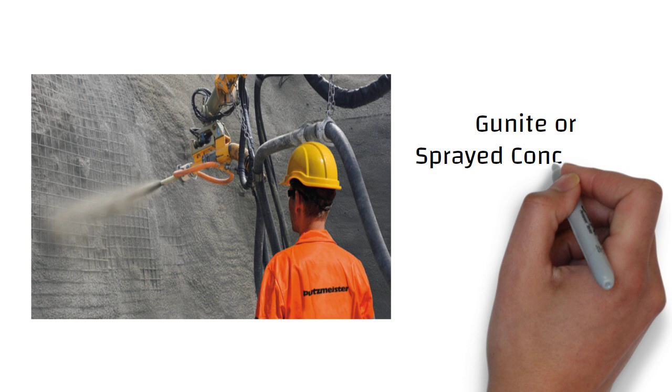Hello friends, shotcrete, also known as gunite, sprayed concrete, pneumatic concrete, or guncrete. This construction technique was first used in 1914.

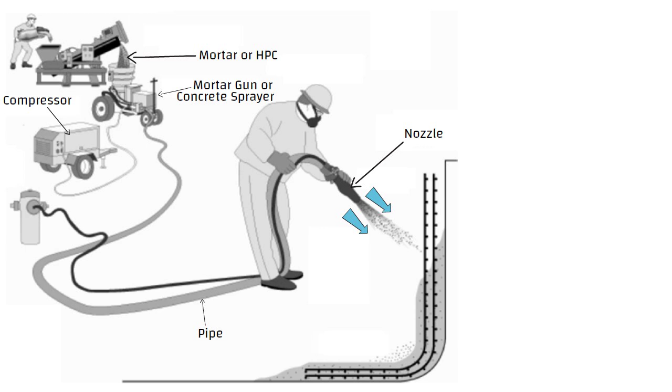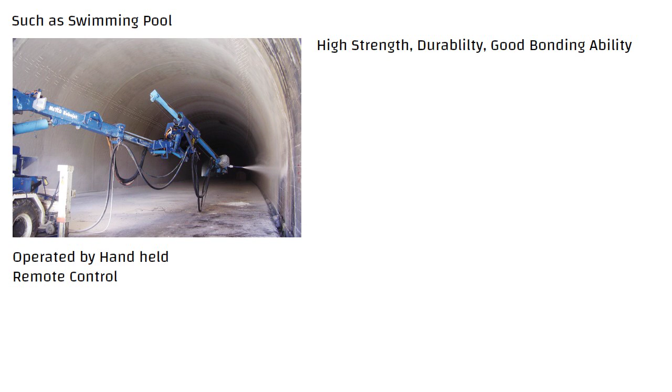Shotcreting is done with a special unit which consists of a mortar gun, also known as concrete sprayer, and a compressor. In this technique, a mortar or high performance concrete is conveyed through a pipe and pneumatically projected at high velocity onto a surface. The nozzle is controlled by hand on small jobs such as swimming pools, and on larger work it is attached to mechanical arms and operated by handheld remote control. It has high strength, durability, good bonding ability, and can be used in areas of difficult access. It can be easily sprayed onto a surface at high velocity, making it handy for operation.

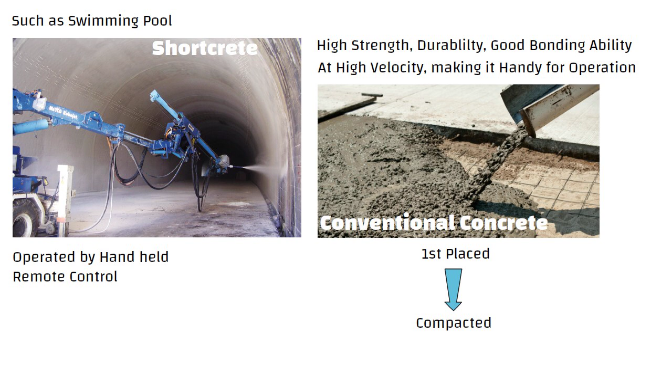Now let us understand how shotcrete is different from conventional concrete. Conventional concrete is first placed and then compacted, whereas shotcrete undergoes placement and compaction at the same time. The impact created by the application consolidates the concrete.

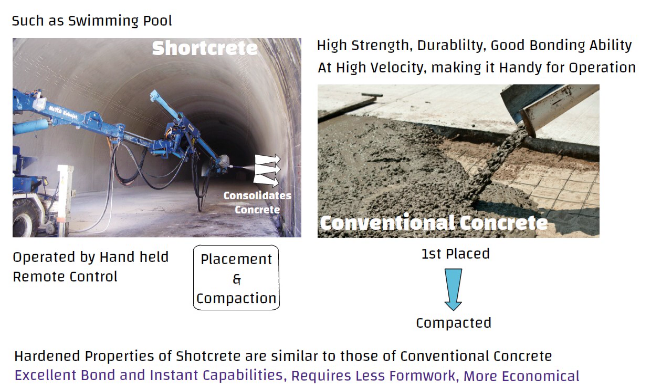Although the hardened properties of shotcrete are similar to those of conventional concrete, the nature of the placement process results in an excellent bond and instant capabilities, particularly on complex forms or shapes. The shotcrete process requires less formwork and can be more economical than conventionally placed concrete. Poured concrete can have a compressive strength of 2500 to 3000 psi, whereas shotcrete exceeds 4000 psi.

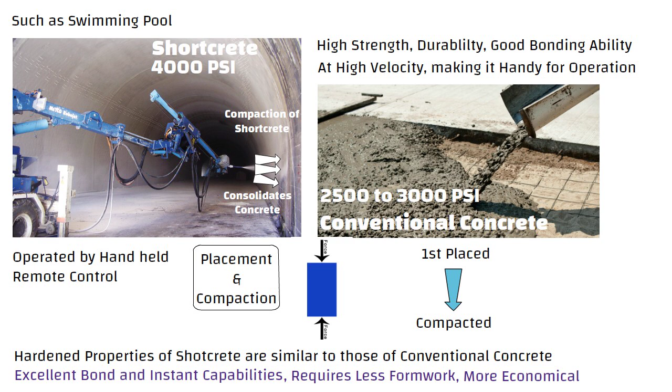When concrete is sprayed on a surface, it causes compaction of the shotcrete paste, which results in good adhesion to the surface. Shotcrete can be applied in two ways: one, wet mix, which we call as shotcrete, and two, dry mix, which is also known as gunite.

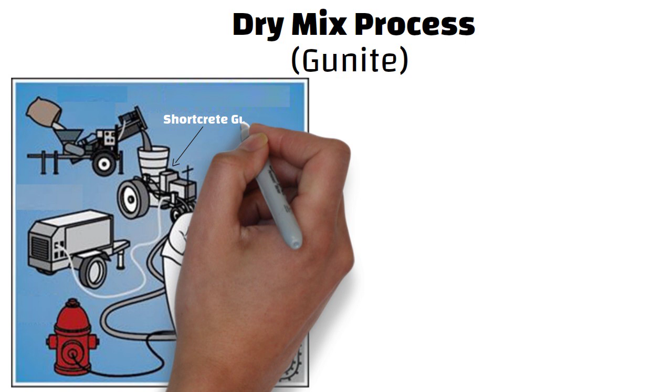Let us discuss the dry mix process first. You can see in this picture, this equipment is called the shotcrete gun, and this is the air compressor. Dry ingredients like cement, sand, aggregate and admixtures are placed into a hopper and blown through a pipe using compressed air to a nozzle. The water is injected at the nozzle by a nozzleman to hydrate the mixture immediately before it is discharged onto the receiving surface.

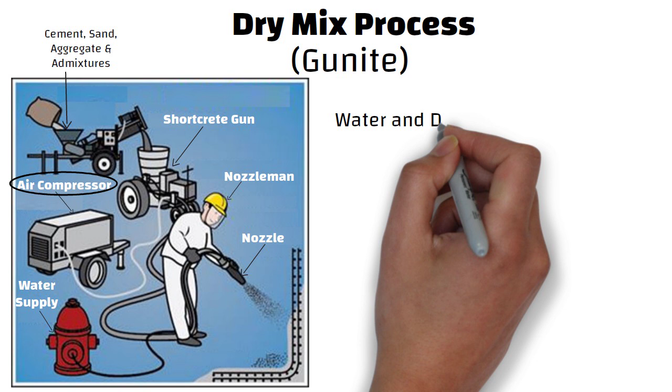The water and the dry mixture are not completely mixed, but this is completed as the mixture hits the receiving surface by high impact. This requires a skilled nozzleman, especially in case of thick or heavily reinforced sections. The nozzleman can operate from 1000 feet horizontally or 500 feet vertically from the gun.

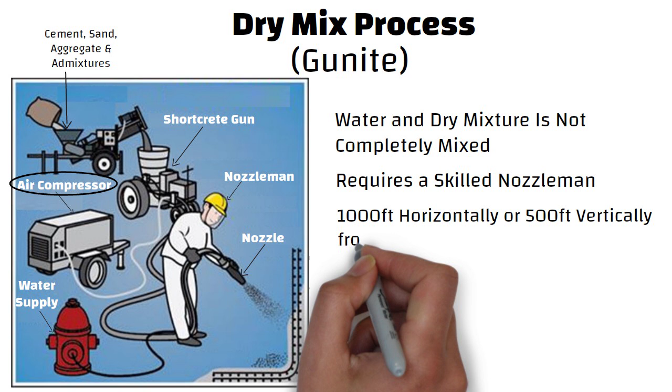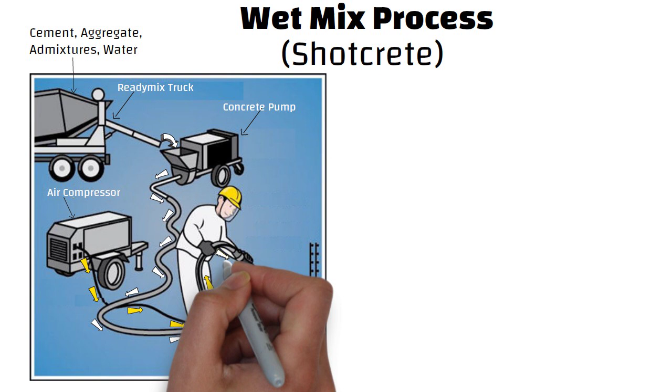Wet mix process. You can see in this picture, the ready mix truck is located here. This is the concrete pump and this is the air compressor. The cementitious material, aggregate, admixtures, including water, are thoroughly mixed by the ready mix truck and poured into a concrete pump. Wet material is pumped to the nozzle where compressed air is introduced to increase the nozzle discharge velocity, and the mixture is thrown onto a receiving surface.

The wet mix process generally produces less rebound, less waste when material falls to the floor, and less dust compared to the dry mix process.

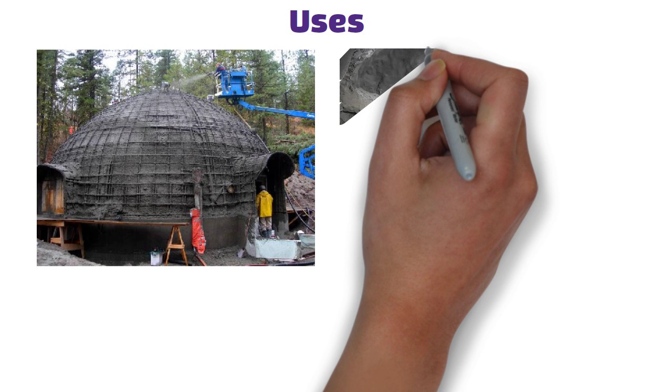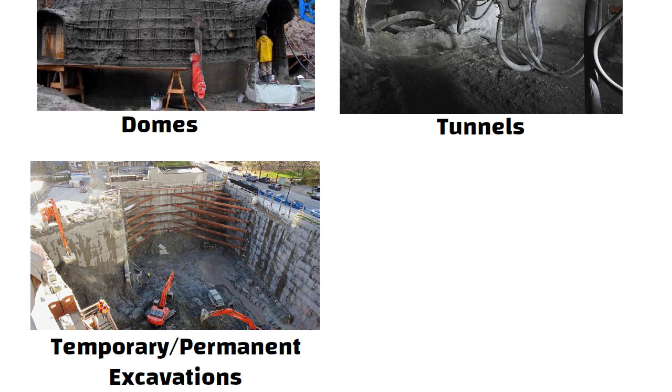Uses. Shotcreting has proved to be the best method for construction of curved surfaces like domes, tunnels, etc. Shotcrete is used to reinforce both temporary and permanent excavations. Shotcrete is advantageous in situations where formwork cannot be placed and where access to the work area is difficult, and where thin layers or variable thickness are required or normal casting techniques cannot be employed.

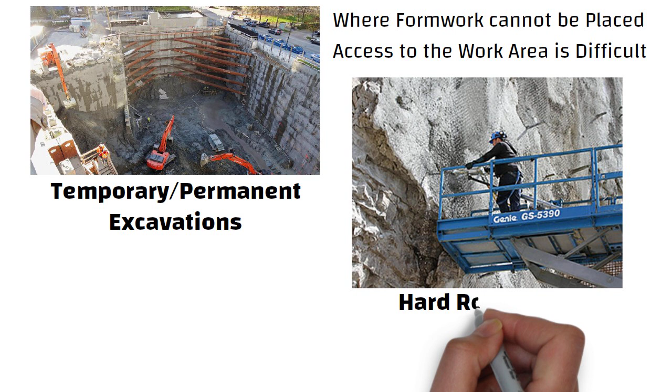Shotcrete is very useful in hard rock mining. Development of decline pathway to go underground is critical for movement of heavy machinery, miners and material. Shotcrete helps make these paths safe from any groundfall.

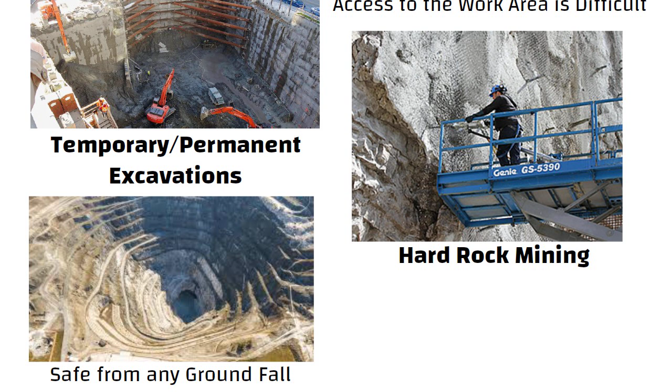Shotcrete has been used extensively to construct concrete swimming pools. Swimming pools constructed with shotcrete are typically more durable and long-lasting than poured concrete. Additionally, the use of shotcrete allows for customization in shape, depth, and styles that are not typically available in traditional pool kits.

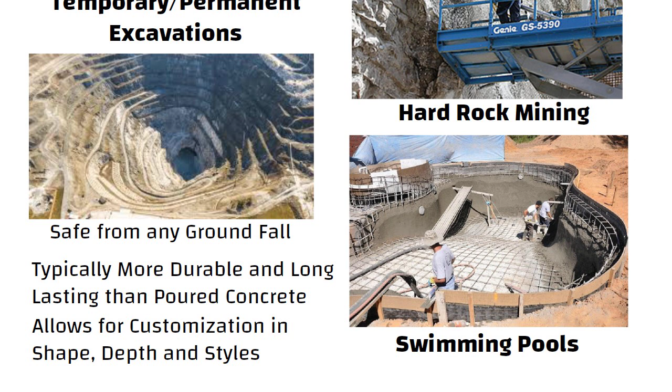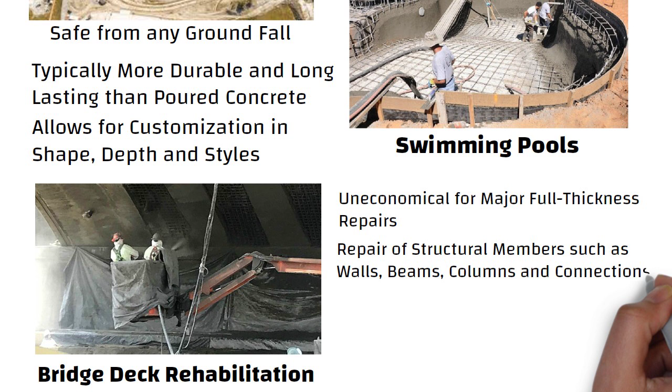Shotcrete repair can be used for bridge deck rehabilitation, but it has generally been uneconomical for major full thickness repairs. The repair of structural members such as walls, beams, columns, and connections is common for structures damaged by earthquake and fire.

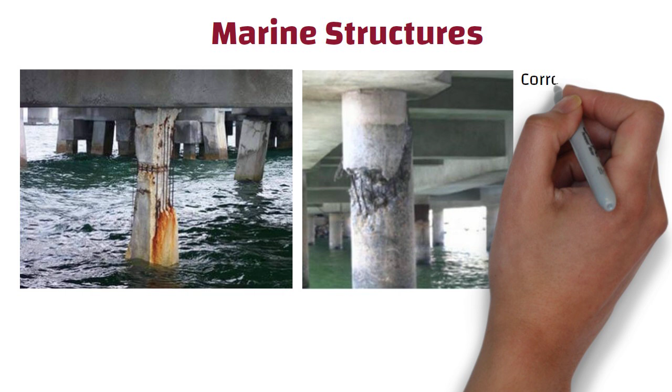Marine structures. Damage to marine structures can result from deterioration of concrete and reinforcement. Damaging conditions are corrosion of steel, freezing and thawing action, impact loading, structural distress, physical abrasion from the action of waves, sand, gravel and floating ice, and chemical attack due to sulfates. These problems can occur in most marine structures such as bridge decks, piles, pile caps, beams, piers, navigation locks, guide walls, dams, powerhouses, and discharge tunnels.

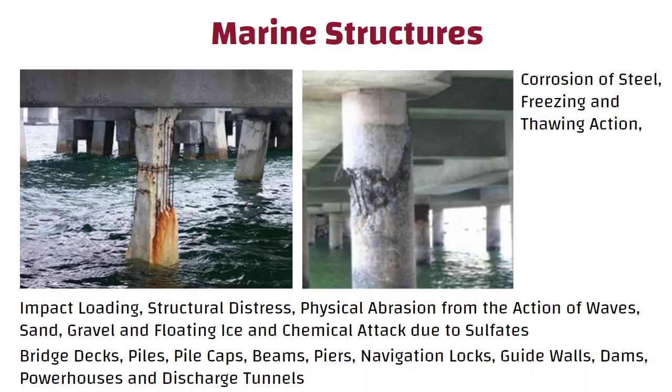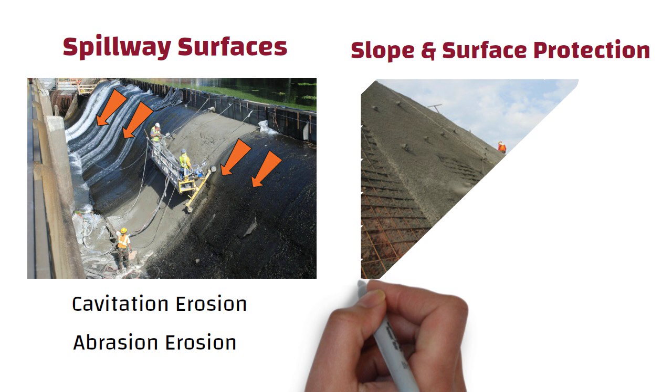Spillway surfaces. Surfaces subject to high velocity flows may be damaged by cavitation erosion or abrasion erosion. Slope and surface protection. Shotcrete is often used for temporary protection of exposed rock surfaces that will deteriorate when exposed to air.

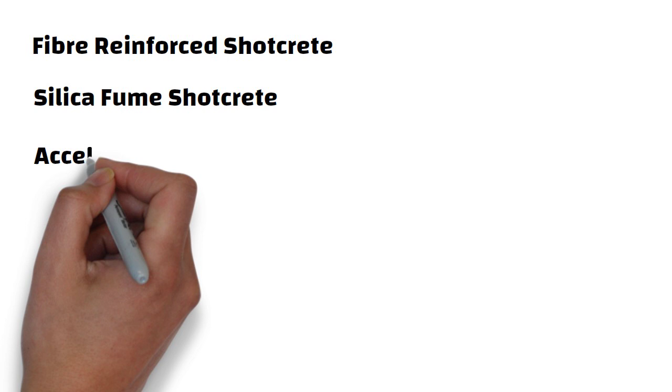Shotcrete can be of 4 types: fiber reinforced shotcrete, silica fume shotcrete, accelerated shotcrete, and polymer modified shotcrete.

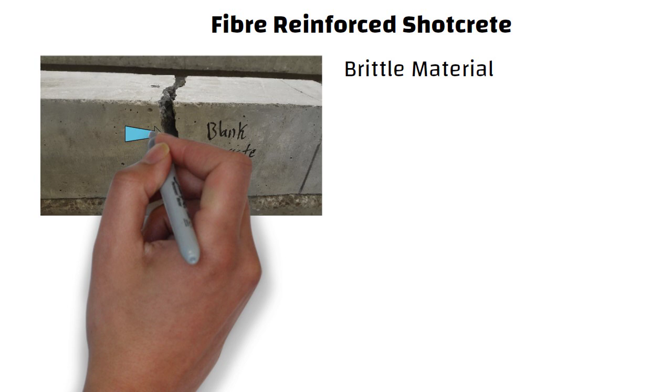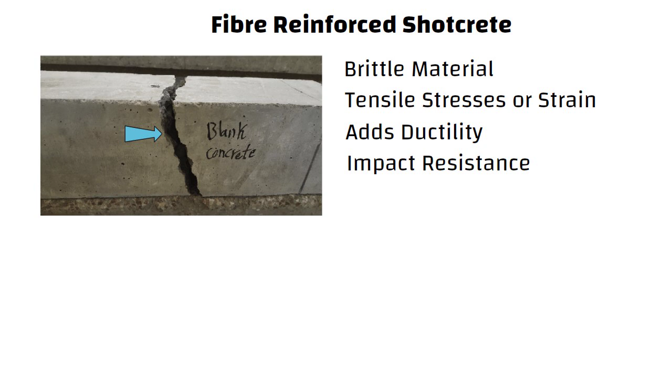Let us discuss fiber reinforced shotcrete first. Unreinforced shotcrete, like unreinforced conventional concrete, is a brittle material that experiences cracking and displacement when subjected to tensile stresses or strains. The addition of fibers to the shotcrete mixture adds ductility to the material as well as energy absorption capacity and impact resistance. Fibers used in shotcrete are available in 3 general forms: steel fibers, glass fibers, and synthetic fibers.

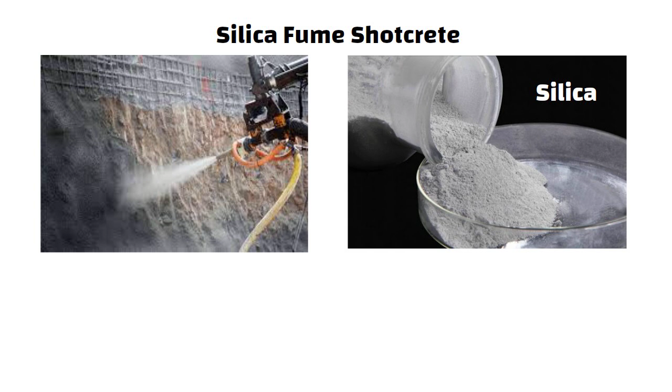Silica fume shotcrete. Silica fume is a very fine non-crystalline pozzolanic material composed mostly of silica. Silica fume is used in shotcrete to increase bond strength, decrease permeability, enhance cohesion and adhesion. Addition of silica fume in shotcrete helps to apply thicker layers of shotcrete in a single pass to vertical and overhead surfaces. Shotcrete containing silica fume may have improved resistance to aggressive chemicals.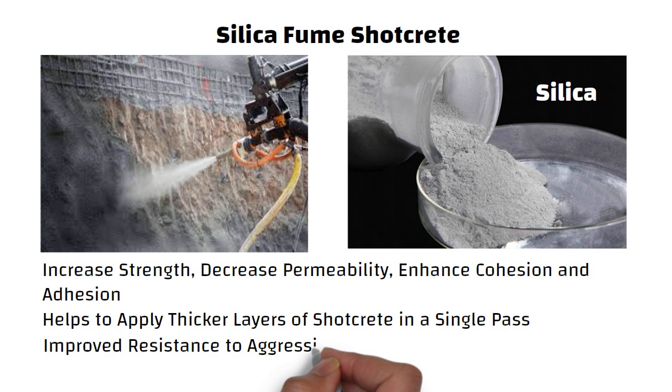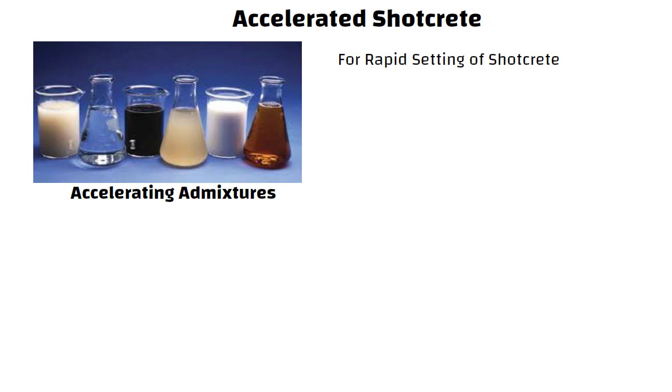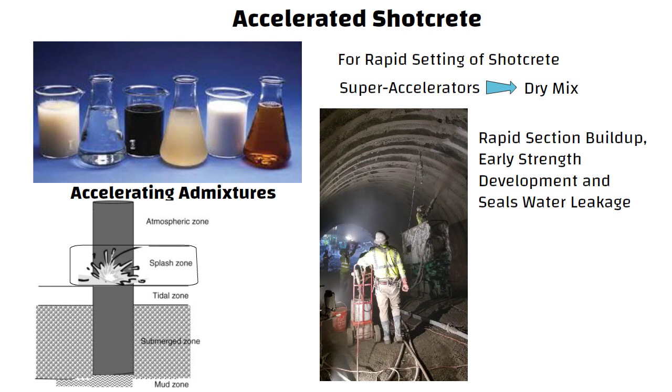Accelerated shotcrete. Accelerating admixtures are used extensively in shotcrete. Highly effective accelerators have been developed for rapid setting of shotcrete, often considered super accelerators. These are commonly used with dry mix shotcrete. Accelerated shotcrete is particularly beneficial in tunnel support because it allows rapid section buildup, early strength development, and seals water leakage. For applications in the splash zone of marine structures, an accelerating admixture may be used to prevent freshly placed shotcrete from being washed away by the incoming tide or by wave action.

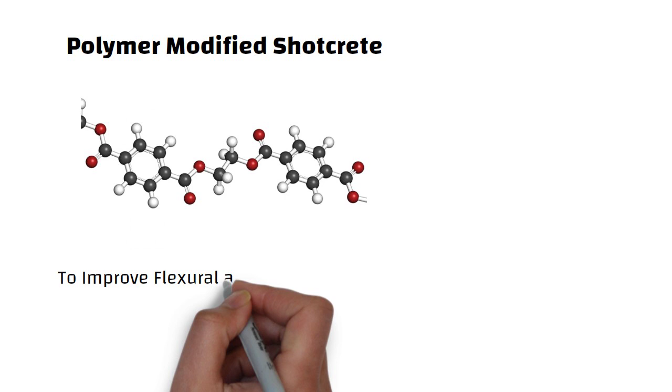Polymer modified shotcrete. Polymers are incorporated into shotcrete to improve flexural and tensile strengths, improve bond, and reduce absorption because of lower permeabilities.